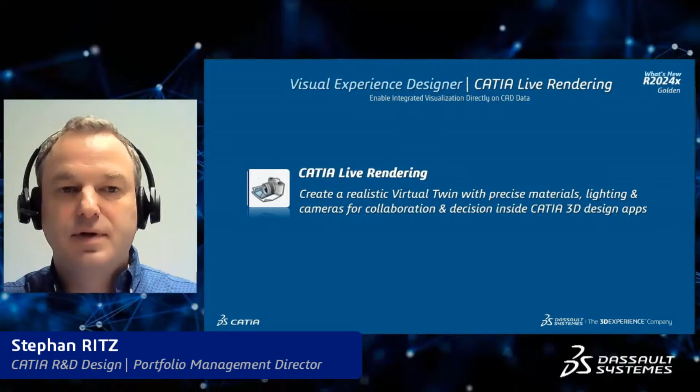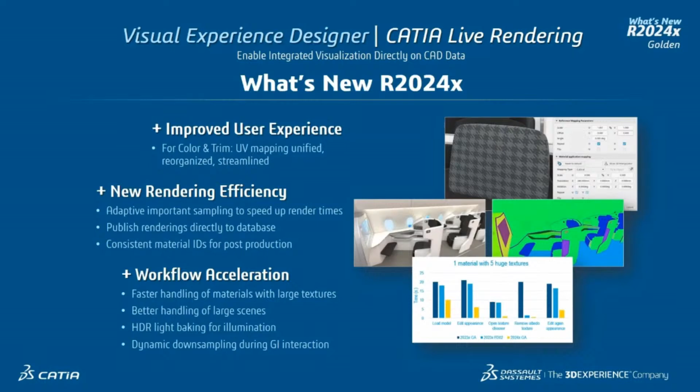So for the release 24X, we have three pillars that we improve for this application. First of all, the user experience, with a special focus on color and trim and UV mapping. The second pillar is about realistic rendering. So we improve the rendering efficiency by better management of precise renderings in the process. And the third pillar is about improving the workflow with a lot of improvements on features as well as performance. And all of this is introduced to you now by Almut BAUER.

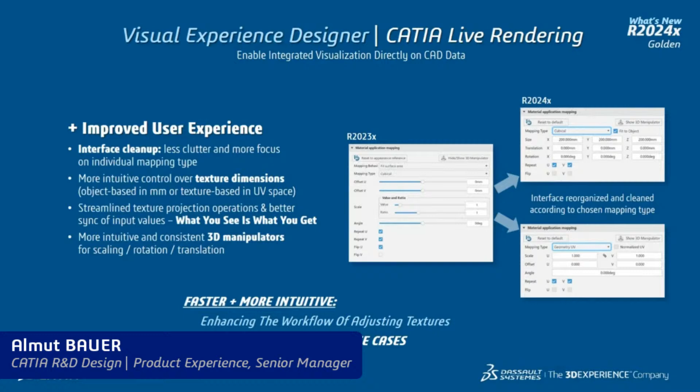Hi. We have drastically improved our user experience with interface cleanups according to chosen mapping types. Users rely on accurate texture dimension, so what you see is what you get. Intuitive and consistent workflow on mapping to accelerate on color and trim use cases. The referenced mapping section is directly available here. In the application mapping, we are here in the UV space. We have a clear demonstration whether operation is in world space coordinates or in UV space.

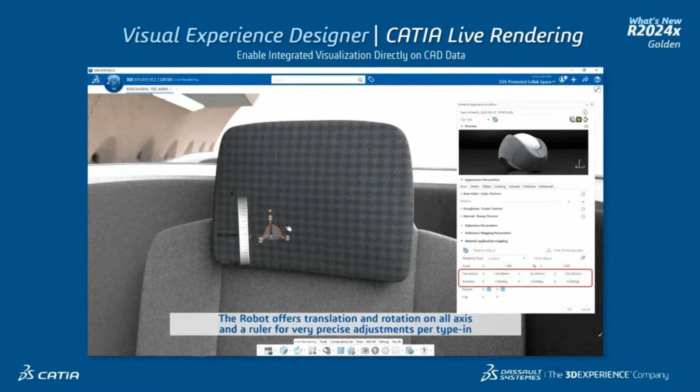Manipulating values in panel or in 3D with the manipulator. It's a standard robot, so we can manipulate here or use the ruler to type in precise values. We can reset to default and in the fit to object mode, scaling the texture to match the bounding box of the currently selected part. To adjust the scale with a physical world size reference in millimeters. We see in the interface, it's in millimeters now.

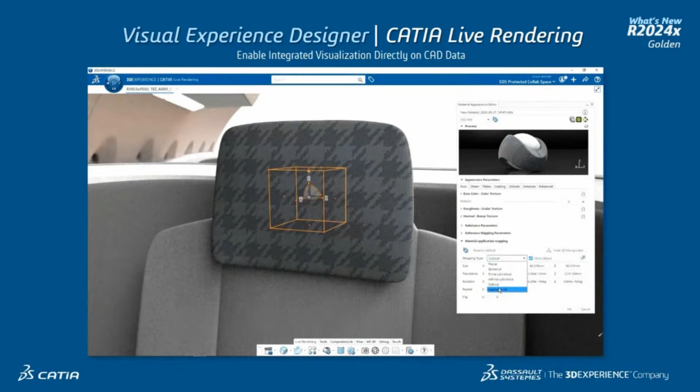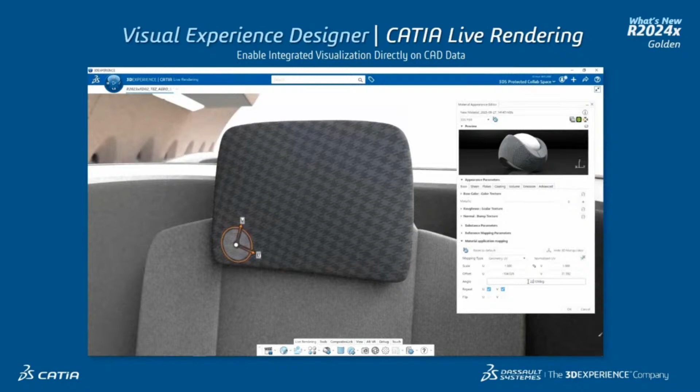In the geometry UV mapping type, we can follow the explicit unwrapping of the shape by sliding with the inner disk of the robot along the surface for accurate positioning of the texture. With well-chosen step sizes, we can also use the scroll wheel of our mouse. For imported geometry, we are offering normalized UVs to the 0-1 space.

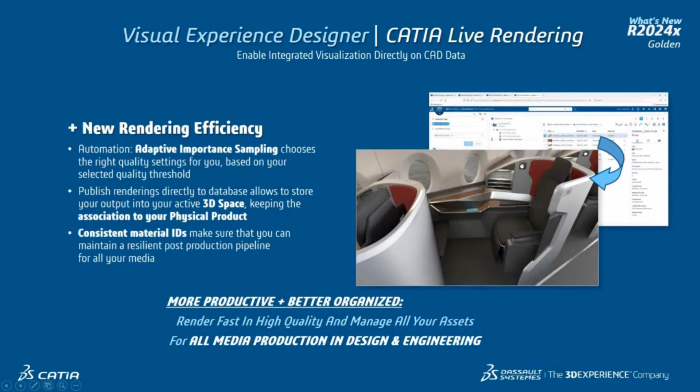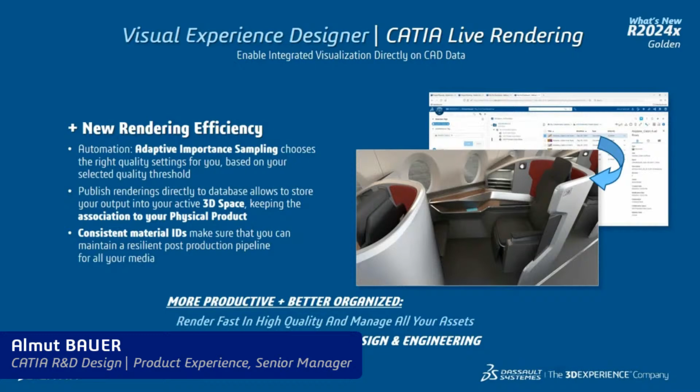About our rendering efficiency, we are providing automation through adaptive importance sampling, publishing render outputs to the database, and consistent material IDs along the post-production pipeline in design and engineering. So let's be organized to communicate render outputs. I'm rendering a beauty and a material ID pass with quality threshold selected. This is providing me the benefit of adaptive importance sampling with a better time to quality for our results.

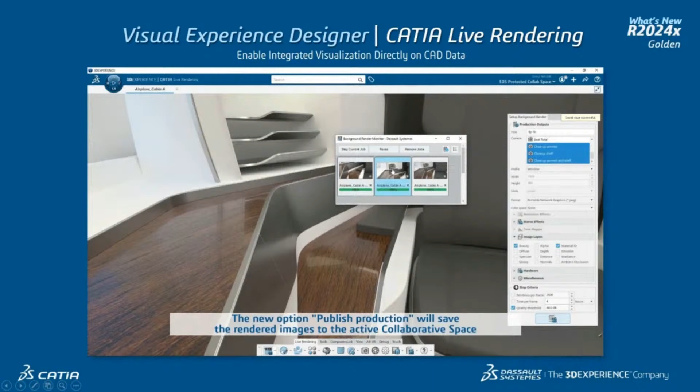I'm transferring the data, rendering it to disk. And on the right-click contextual menu, we have a preview, so we can pre-check our results if we want to upload to database. Then we can access the production folder, now also already while jobs are still progressing, and publish production. So clicking this command here, we are publishing our production to the active collaborative space attached to the root product. We see the icon, it's uploading, and once it's done, it changes. So users always know if the job has already been uploaded or not. And we can shut down the server directly from this monitor page now.

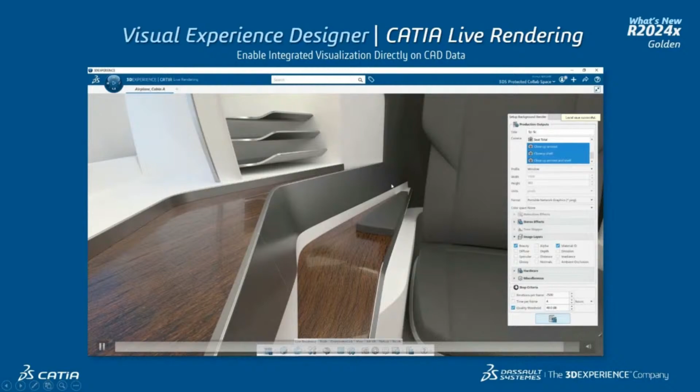We have also worked on workflow acceleration, improved performance, skipped delay times. We have faster loading and unloading of scenes with large textures and large assemblies, meaning we have multiple instances, faster opening, and also the editing in the material editor is much faster.

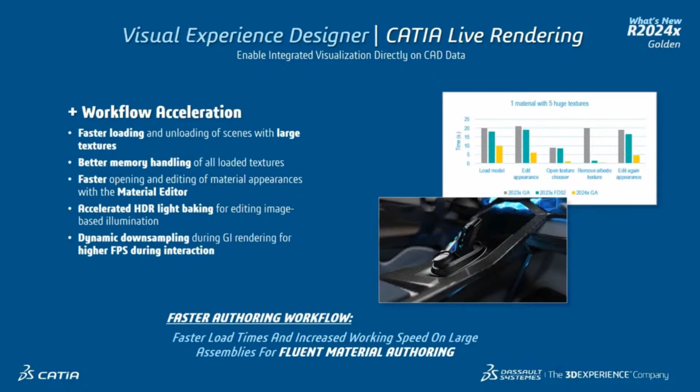We can see it on the graph on the right side. So we clearly see our enhancements through the releases. Some actions are even instant, like opening the texture chooser or removing albedo textures. Also on HDR light baking, we have improved, same for dynamic downsampling during GI.

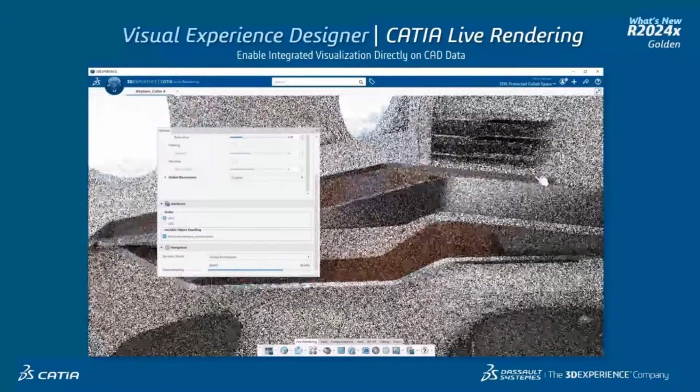Here is the example. With dynamic downsampling, the user can define whether to navigate in rasterizer or in GI. With GI chosen during navigation, the user can further decide based on hardware, model, and its performance to adjust the resolution dynamically for better interaction with the model while staying in full screen. This provides the best compromise between performance and quality.

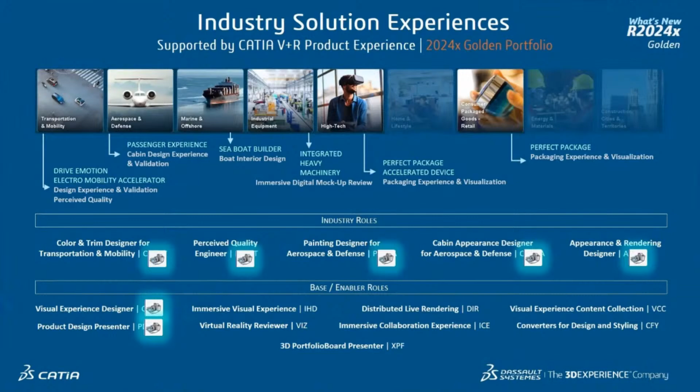So CATIA Live Rendering, with all of the great improvements, is embedded into the role Visual Experience Designer. But it's also embedded into the specialized industry roles for experts to enable collaboration and decision-making. And on top, it's integrated into our role Product Design Presenter. This role builds a bridge between visualization and decision-making.

And it's improved for this new release with a new application called CATIA 3D Rendering Preparation. This application provides the capabilities to quickly prepare CAD geometries for material application and high-end visualization. It enables use cases like, for instance, unwrapping of complex surfaces, and also the isolation and separation of surfaces.

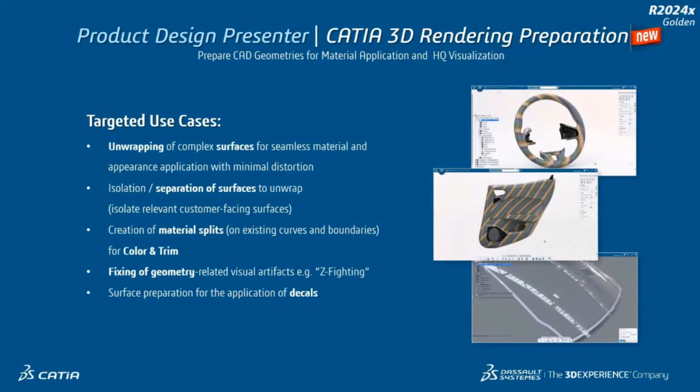It helps color and trim designers to create material splits, or people to fix geometry-related visual artifacts, like, for instance, z-fighting. For this, we have integrated a specific functional scope in these applications with dedicated features. These features, together with their impact on the use cases, are now introduced to you by Peter KOEHLER.

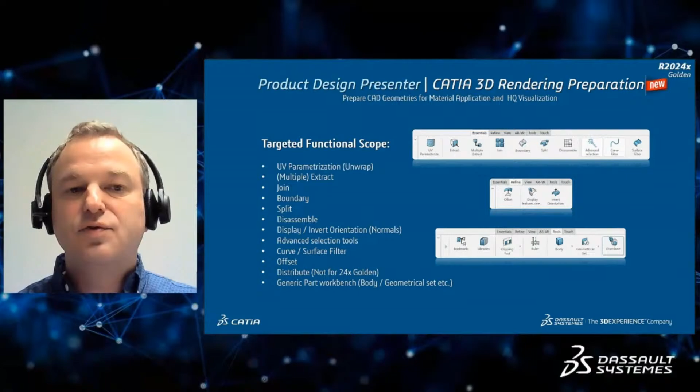Thank you, Stephan. So as Stephan already mentioned, the application focuses on unwrapping. So I will show some use cases or some scenarios of how we can do that, but also feature some other smaller tools to quickly fix some visualization artifacts. And that is shown in the video we have on the next slide.

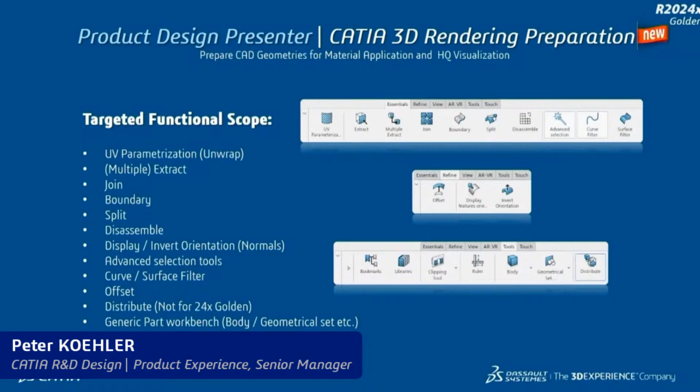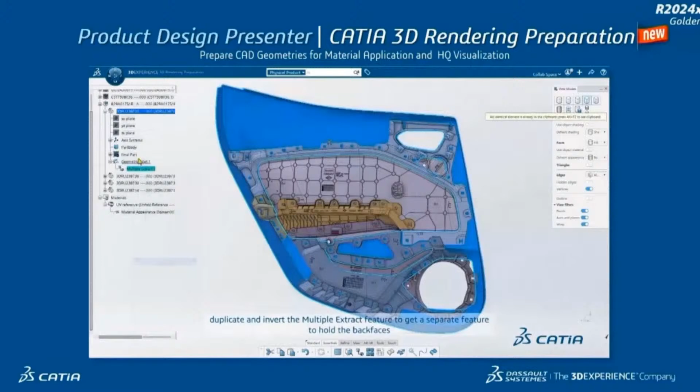So we have a very simple scenario with still complex geometry. This scenario works in, let's say, 80% of the cases. And here we can use the multi-extract feature that we have in our application packaged together with the powerful propagation to, with one click, simply automatically separate the front-facing, customer-facing faces from the backside of a part that we do not need to unwrap.

So we now have a clear separation with one simple command, and we can then run the unwrap command with no further settings, and we get a nice low-distortion and uniform unwrap.

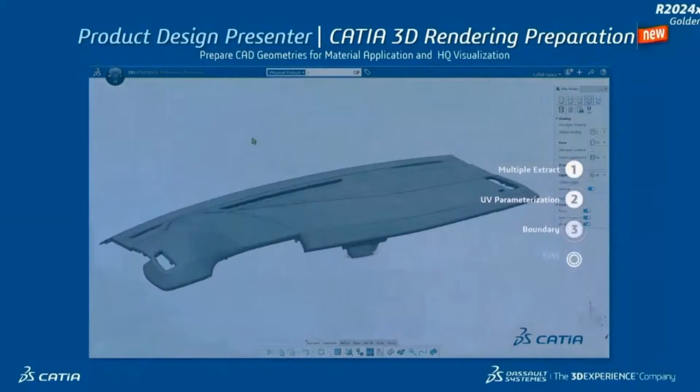In a bit more complex scenario with more complex geometry, for example, this dashboard here, where this propagation does not give the expected results, we can assist this command by quickly manually selecting a loop of faces where we want the geometry to be split. So this can be rough. It's just that we generate a break for the tangent continuity, as shown here.

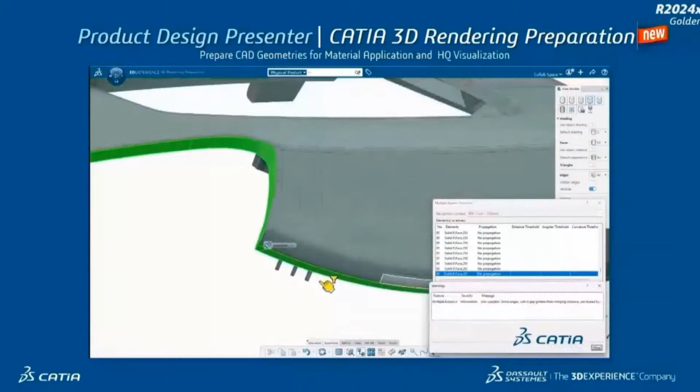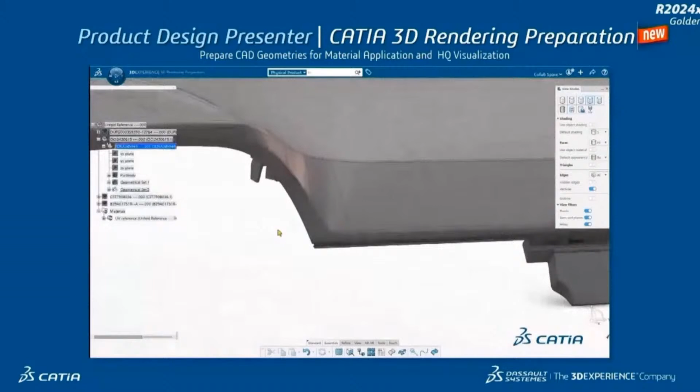So we create a loop of faces around where we want to split the geometry. And when we've done that, we can again run the multi-extract and do the same thing that we did before with the door. We can then choose the upper part and again use the tangent continuity to create a powerful propagation. So we've seen here we have split just the edges out of it.

Now we can separate it again and we get a perfect separation of the front faces. So now we can run the unwrap. So we see a nice clean unwrap of the upper surfaces. We still want the back faces back because we want to render them as well.

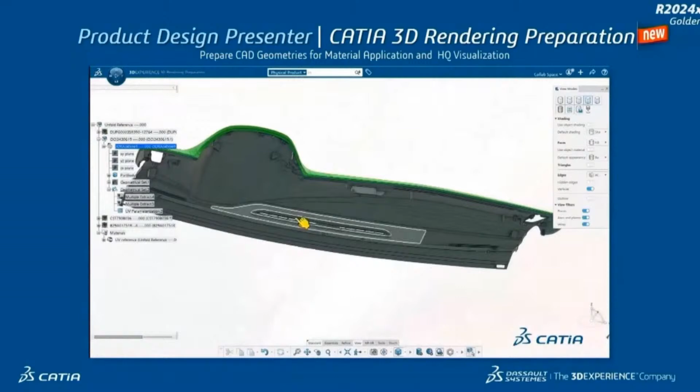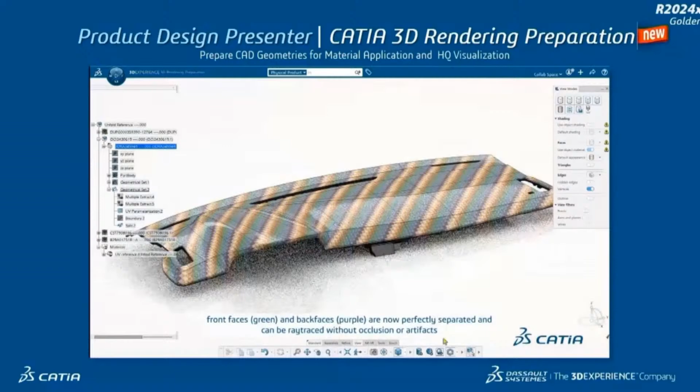So we need to split the front faces apart from it. We can use the boundary feature that we have also packaged as well as the split feature. We can use the boundary we just created to split the original geometry exactly at this boundary. And then we have a nice separation of front and back, visualized here in green and purple. And we can now also render this in ray tracing in Stellar because we have no duplicated geometries.

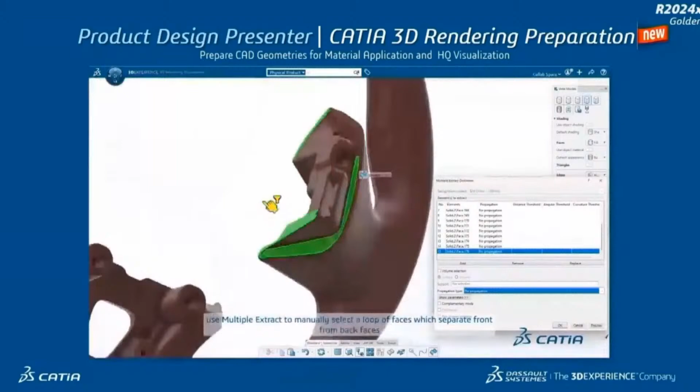And now what I call the worst case scenario is both closed but also convex geometry, for example, rims or here a steering wheel. And we repeat the first step of what we did with the dashboard. So quickly and roughly separate a loop of faces that we want to cut away or that we want to separate. So here it's 3 parts around where the steering wheel is attached. That is not customer facing, that we do not need to unwrap.

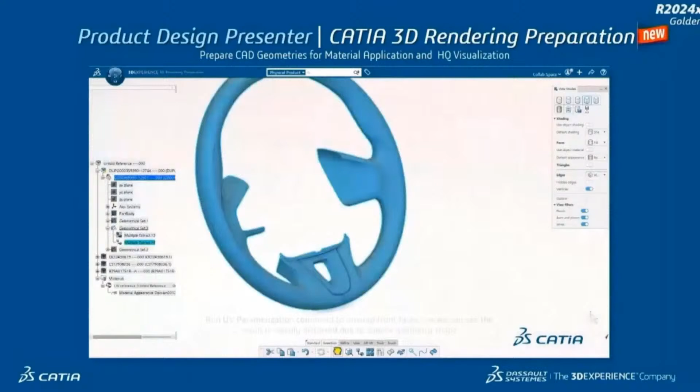We invert the selection. Now again, we extract with tangent continuity the customer-facing faces, hide the rest. So we just have the beautiful faces we want to unwrap. If we now do an unwrap, we see we still have heavy distortions because it's a convex shape. So what we can do is split the geometry in 2, in the front and the back face.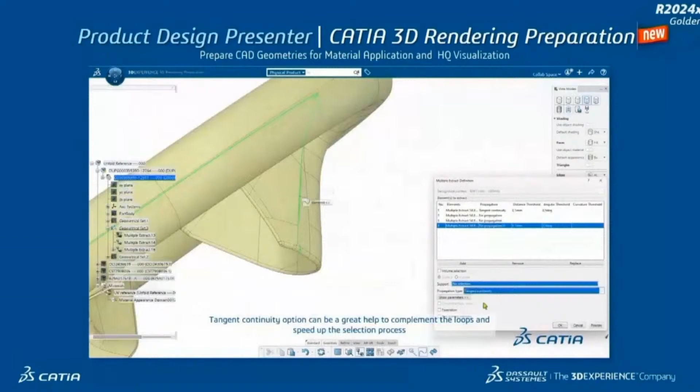Again, we have edge filters and again the multi-extract, which helps us again with tangent continuity to quickly select all the loops that we want to select. So we have an automatic complementary selection of edges, and we can select the missing edges. And within a minute, we have a nice edge loop that we can use again to split our geometry in 2. So here we can switch between front and back.

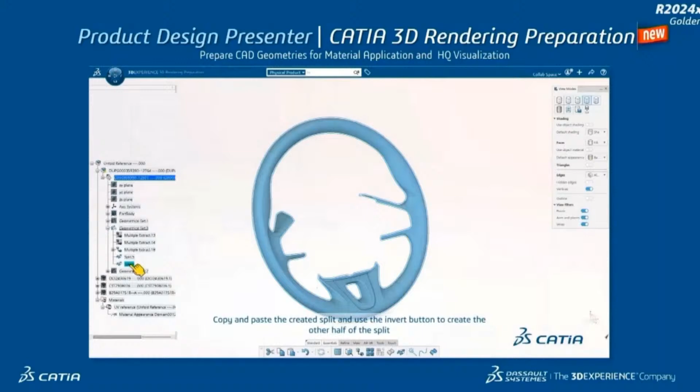We duplicate it and invert it. So we also have the back faces of that. And these both we can now unwrap individually. We're doing it for the front side. We see the result is now much better, but still not optimal. We still have minor distortions. We see the difference in scale.

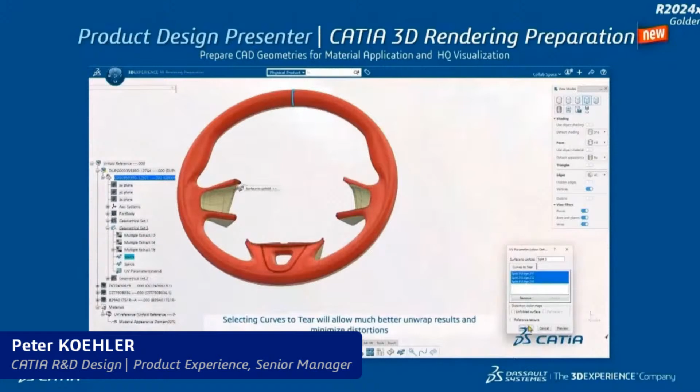But here we can simply use the curves to tear functionality of our unwrapping command. Just set a tearing curve at the very top. And now we see we get a perfectly aligned UV unwrapping that we can use for our distortionless material visualization. And now we're just repeating with the boundary and the splitting to get the back faces back. And we can see we can nicely render that in Stellar without any distortions.

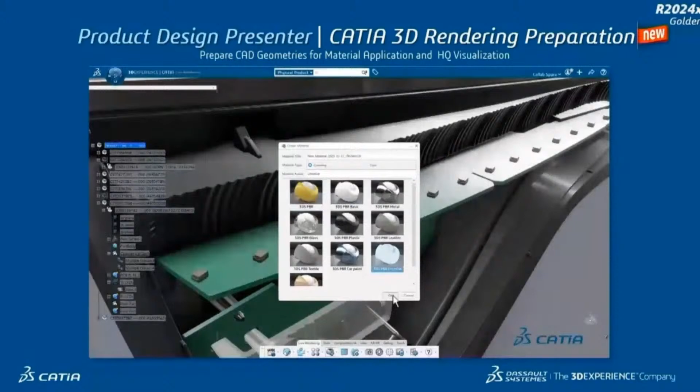Another scenario or use case of this application is material splits. So a basic example is we have supplier data, for example, from a tail lamp, and we want to visualize the LEDs, but we do not have an own feature just for the dots of the LEDs. So again, we can simply use the multi-extract feature, duplicate it, invert it, and so quickly separate single geometries for our material application. So we can just apply a glow material just on the dots of the LEDs.

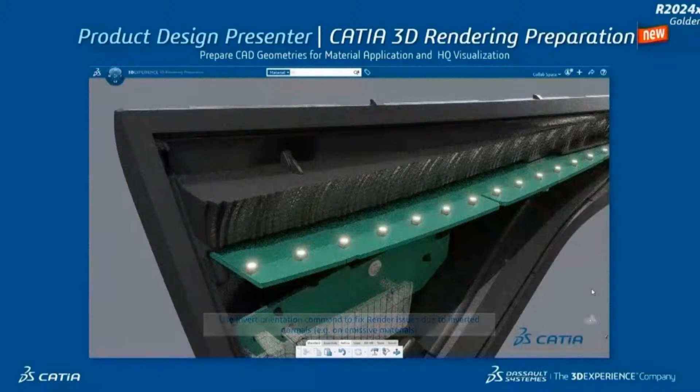And speaking of emissive materials, in Stellar, it's important that our normals are aligned in the right direction. So here's an example. We see the LEDs are black because they are inverted. We also have the orientation inversion feature here, where we can quickly fix exactly those issues.

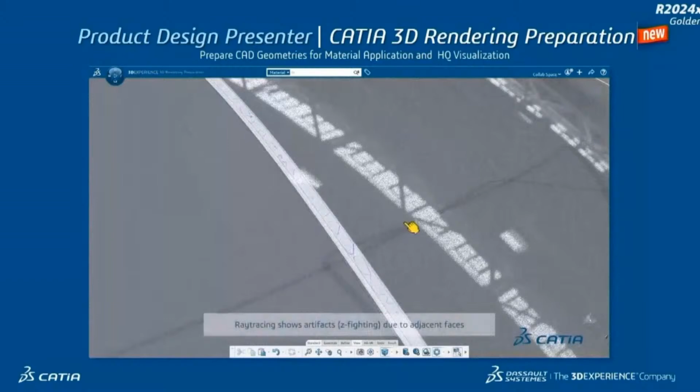And last but not least, the so-called z-fighting visualization rendering artifact. If we have connecting faces, usually the way things are modeled, a physical renderer cannot cope with it because we get so-called z-fighting artifacts. So the renderer does not know which surface to render in which direction. So here we have an offset feature, and we can simply assign a very small offset to one of those faces to fix exactly these kind of artifacts. And we see we can now ray trace it without any artifacts.

And that's it for this new application. We have seen now all the great improvements in the role Product Design Presenter in terms of integrated precise visualization. But as introduced before, the role is facilitating also visual decisions. And the core application for visual decision making in the CATIA design processes is CATIA Product Perception Experience.

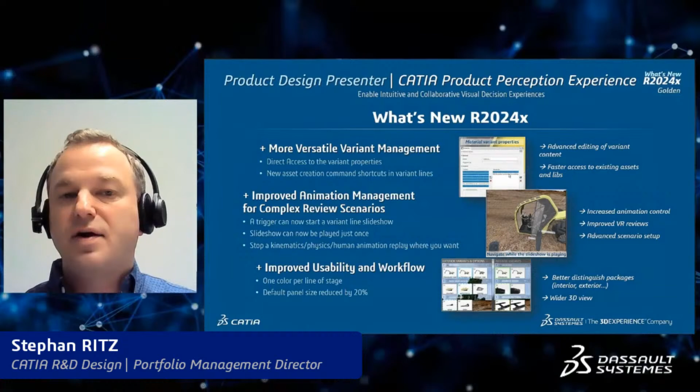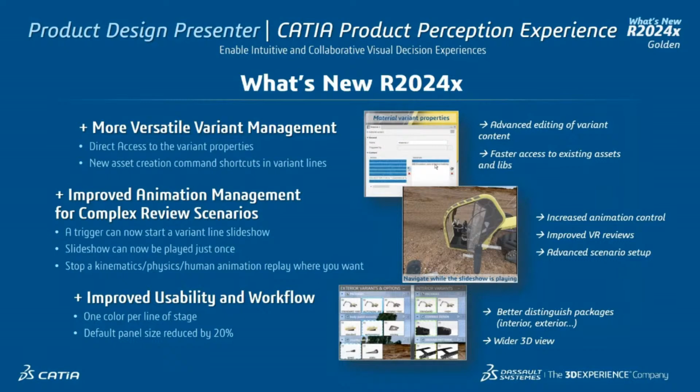The application is improved in 3 different pillars with the release 2024x Golden. First of all, we have a more versatile variant management, for instance, with direct access to variant properties. For the second big block, we enable now complex review scenarios also for VR by an improvement on slideshows, but also on animation management. Following the tradition of the application, we have once more improved usability and workflow. This all is now introduced to you by Manuel Duchet.

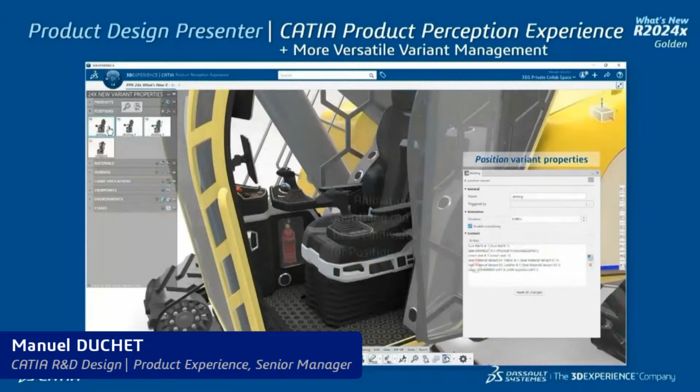Starting with variant management, you will have a new properties command for each type of variant that will give you the list and the detailed definition of the variant, like the list of objects participating to the variant: product, position variant. If a position variant is an animated one, you have also an option to control the smooth effect of the animation. Material variant, what material to what actors. Human variant, the list of humans and also the smooth effect animation.

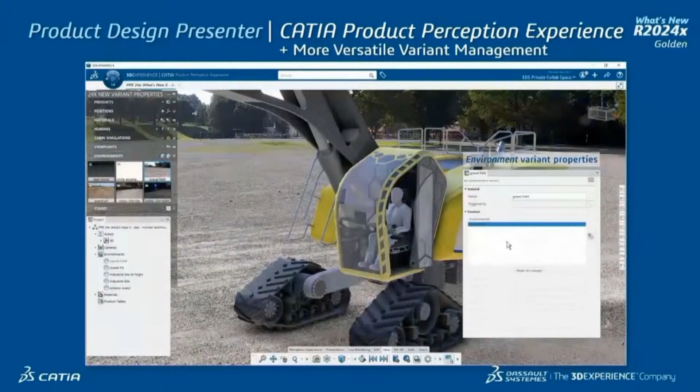We go on with viewpoint variants. This is already available since 2023x FD03, the complete list of camera parameters. Environment variants, the possibility to replace the ambience. And finally, for stage variants, the list of variants it activates with a reminder of where the variant is found: in what panel, what lines the variant activated by a stage is listed.

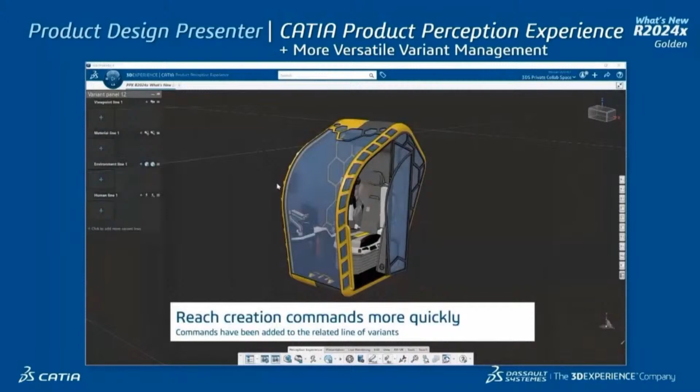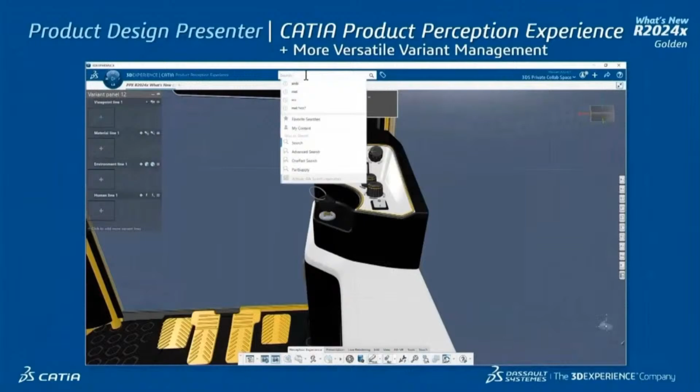There are some other features like additional shortcut commands that we have added to the variant panel user interface so that you can more quickly reach existing libraries of assets and existing data from search results. So this for existing cameras, materials, ambiances, and humans. So with that, you should do less mouse kilometers, less mouse miles. Maybe you can even hide the action bar to have a wider 3D area.

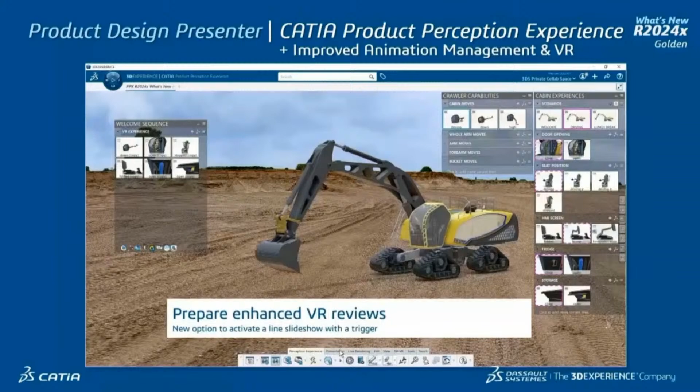The next big series of topics is about animation control. With first a simple option to play the slideshow of a variant line just once to stop the loop mode. And regarding the slideshow of a variant line, also the possibility to activate it with a trigger object or a hotkey. This will be pretty useful, we believe, for VR reviews when you want to play a series of animations, like here a line of position variants. And while the series of animations is playing, you can still navigate or activate some other variants.

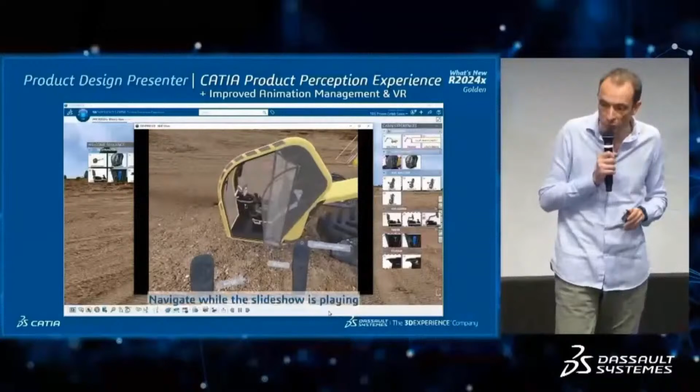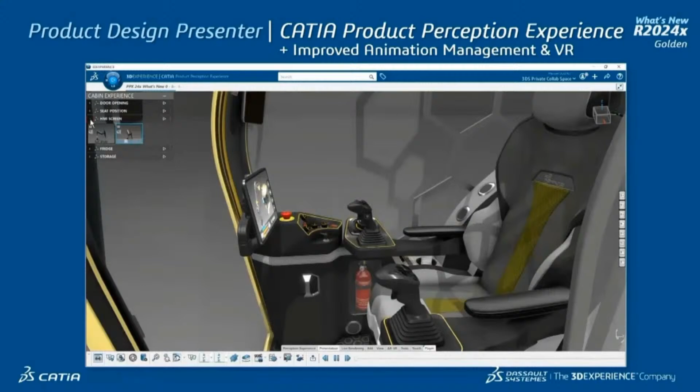So, yes, two enhancements regarding the play of slideshow of a variant line. Another one is the possibility for existing animation, kinematics, physics, human, to stop it at a given step. You get a simulation result to replay. Maybe it's too long, you just want the first part of it, like here, just folding the screen, not showing the whole animation. You are autonomous, you don't need to go back and check with your engineering colleagues to redo a simulation. You can have this greater control on existing animation you insert in your design presentation.

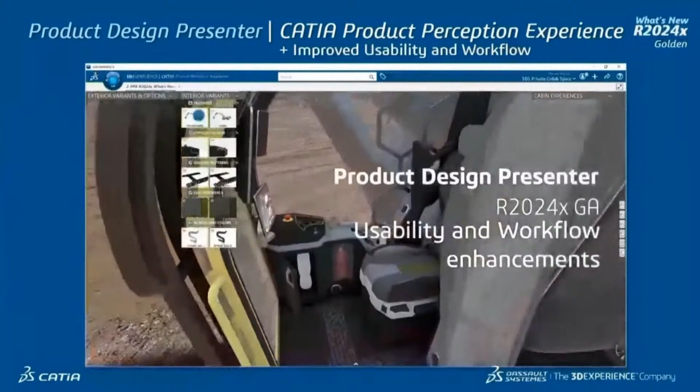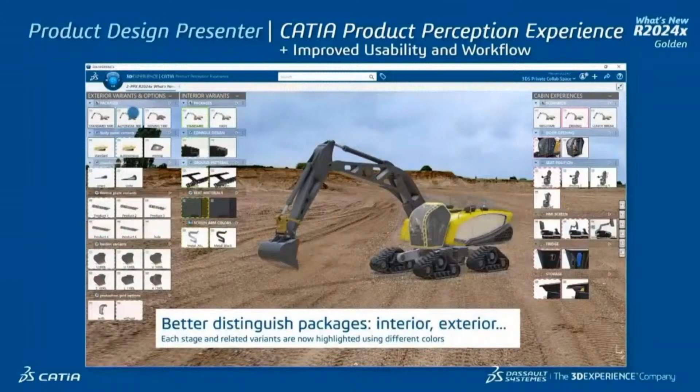The last series of enhancements is about usability and workflow. You create more and more stages. So now you will have the possibility to quickly distinguish between different stage lines thanks to different colors. So if you have a line of stages for interior packages, one for exterior packages, maybe another one for the experience, the usage of your design, each of the stage lines will have a different color. And as always, now the variants it activates are in dotted lines.

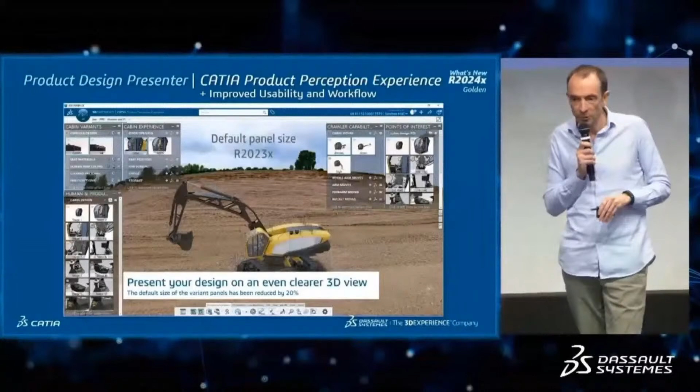But because you also have more and more panels in your perception experiences, we have changed the default panel size, decreasing it by 20%. Pretty simple, but we noticed what you were doing, going to the preferences, setting the size to 80%; this will be the new default size. So we hope that with this, you will create even more advanced design presentations.

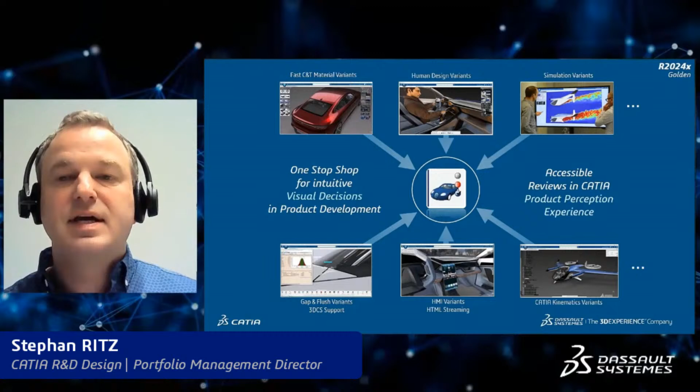Thank you, Manuel. Stephan? Beside all the great improvements that Manuel just has shown to us, there's another remarkable trend for the application Product Perception Experience that I want to highlight, because it's becoming more and more the one-stop shop for intuitive visual decisions in product development. Why? Because it supports so many different variants for the decision-making processes that the people and the different stakeholders have a very good tool to have an efficient decision setup.

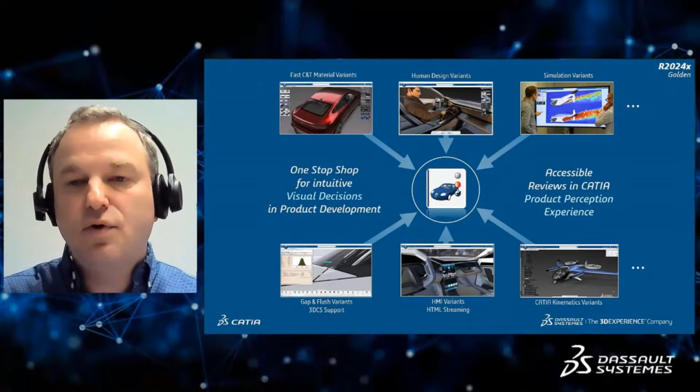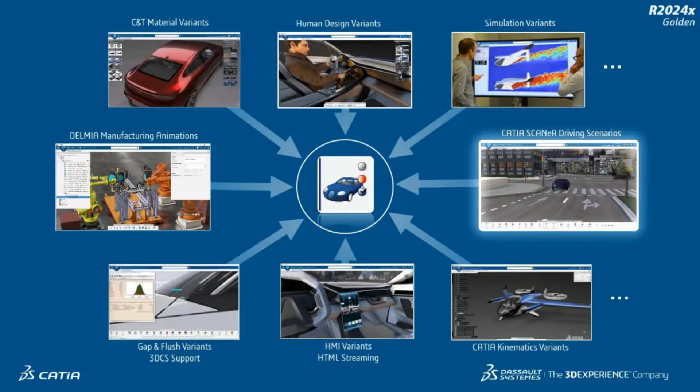But we have more variant types that are supported by this application, and I want to highlight here two variant types. First, the DELMIA manufacturing animations, which enable us to bring robotic animations into the discussion, in the decision-making process, like you see here on the left. Then the second animation type is a CATIA SCANeR driving animation that you can see here. We can bring in a CATIA SCANeR scenario over the physics results into our decision-making process directly in Product Perception Experience and have a very, very versatile setup, even for scenarization.

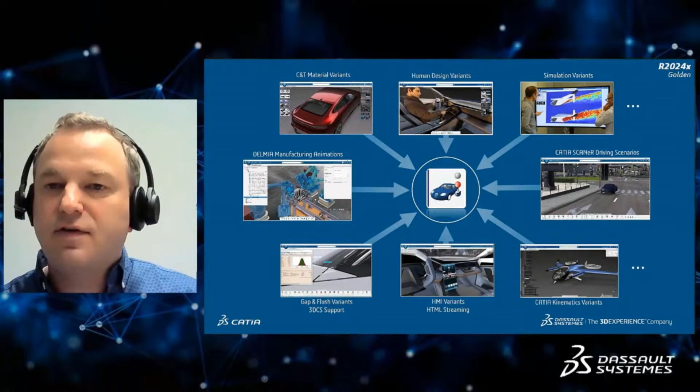After we have seen the great improvements for integrated precise visualization and intuitive visual decision experiences, now let's take a look at what we improved for mixed reality with this release. In the past, we were already introducing that we work on the integration of OpenXR for these enablers. Now we have reached a very good level and we benefit from this integration of the open interface. The first improvement that we can show and highlight for the R2024x release is the support of the Varjo XR-3 device with its mixed reality capabilities. This is now introduced to you by Michael Reiter.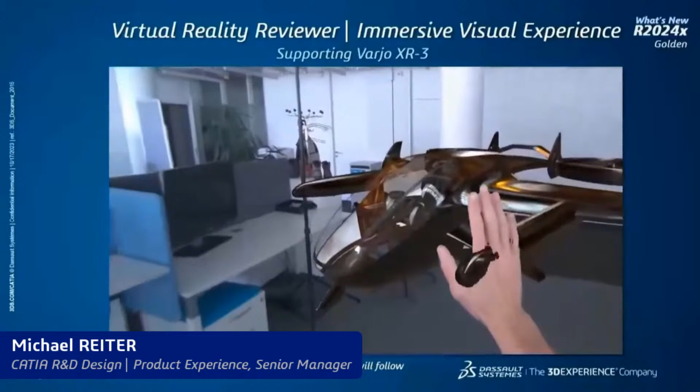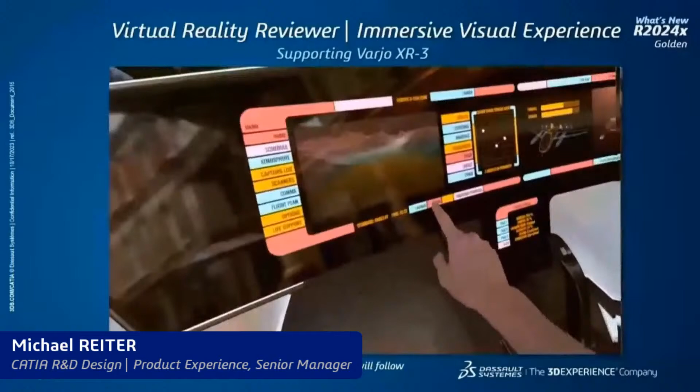Yes, so with 24x GA as well as 23x FD04, we're finally bringing the Varjo XR-3 mixed reality integration. So you will have access to the compositing, as you see here, as well as the hand occlusion feature to enable people to get a better understanding of the ergonomics of their product. And we will follow up on that with a finger tracking integration in the future. So for now, you have this available in the generic HMD command, not yet in application-specific commands like PPX VR, human incarnation, etc. But that's also on our list.

Thanks a lot, Michael. This is finalizing our presentation on what's new in the R2024x Golden Release for VR Product Experiences in CATIA Design.